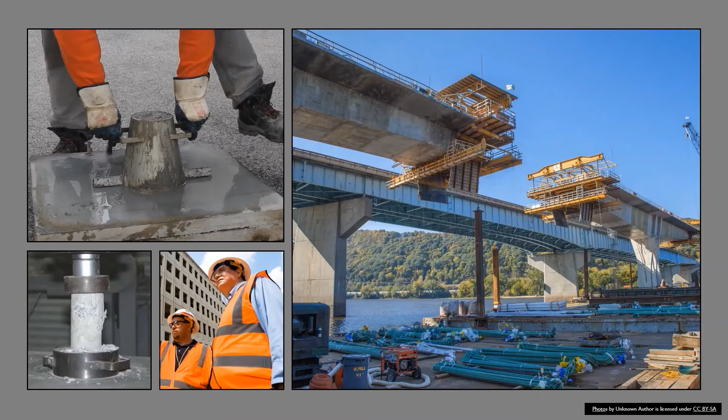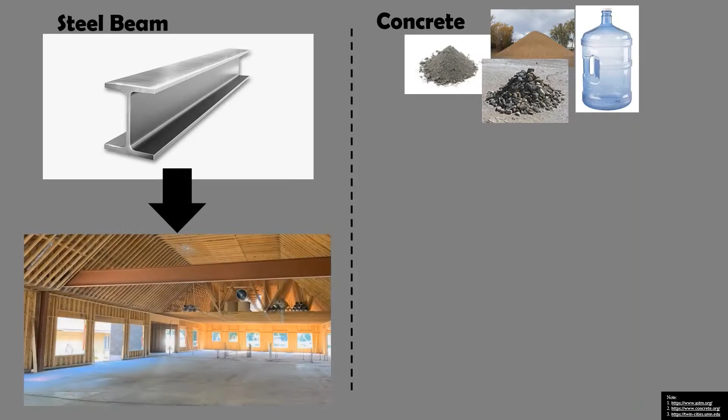Concrete is one of the few construction materials truly created during the building process. Other construction materials, such as a steel or wood beam, only need a delivery distribution path, whereas concrete requires an additional distribution path of knowledge. The University of Minnesota Concrete Conference is part of that knowledge distribution path.

What do you get from attending this year's conference? 0.65 continuing education units for 6.5 hours of participation. Presentations ranging from alternative supplementary cementitious materials to highlighting the new 11 on the River high-rise in Minneapolis. Continual participation in one of the nation's leading conferences for the exchange of current concrete knowledge.

The conference will offer you a lot, but the Planning Committee would like to give you something right now. The Universal Concrete Mix Design, which has been used throughout the world for centuries.

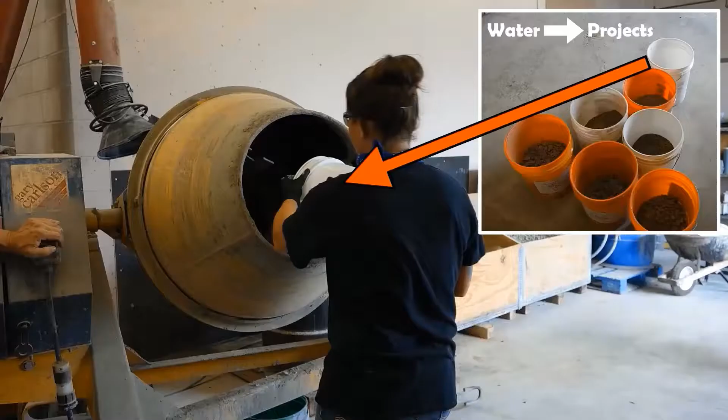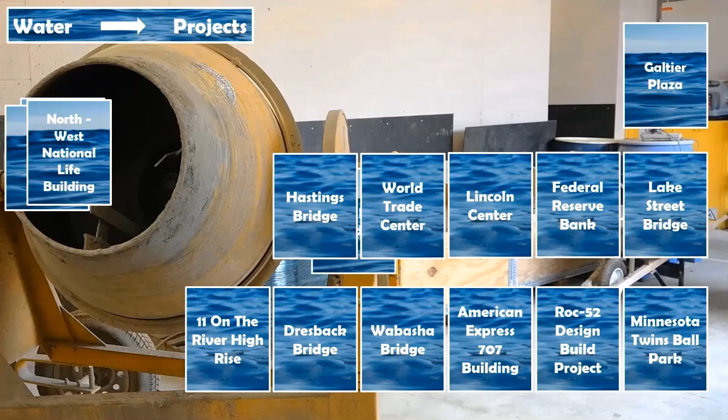We would like to draw an analogy from the 4 main ingredients in our concrete to our concrete conference speakers, audience, advancements, and projects. In our analogy, the projects that we have highlighted at this conference over the last 70 years are the water of the conference. Here are a few of the projects highlighted in previous conferences.

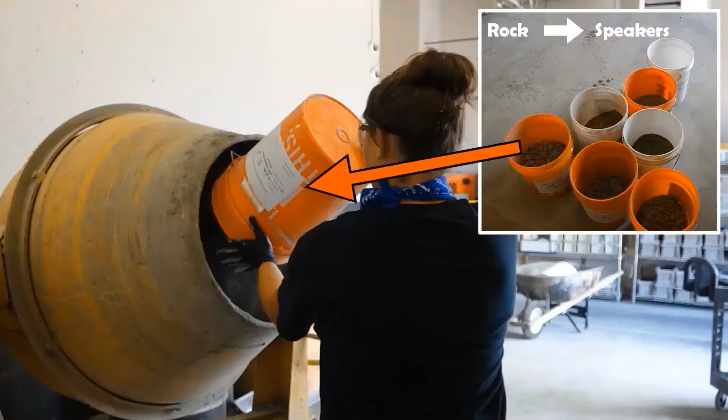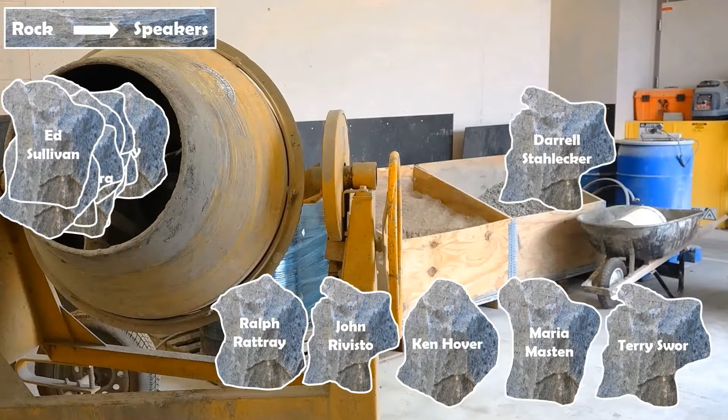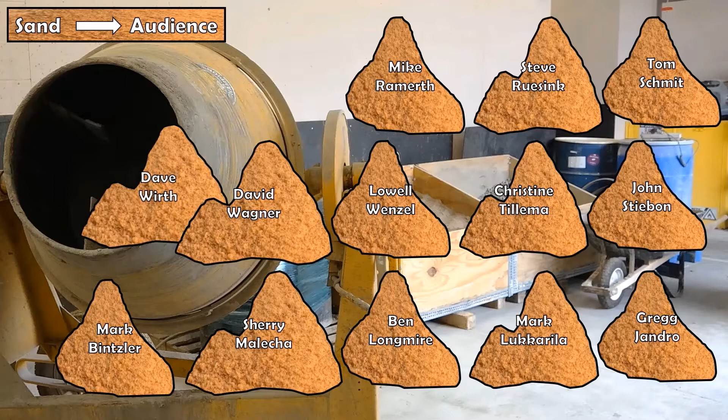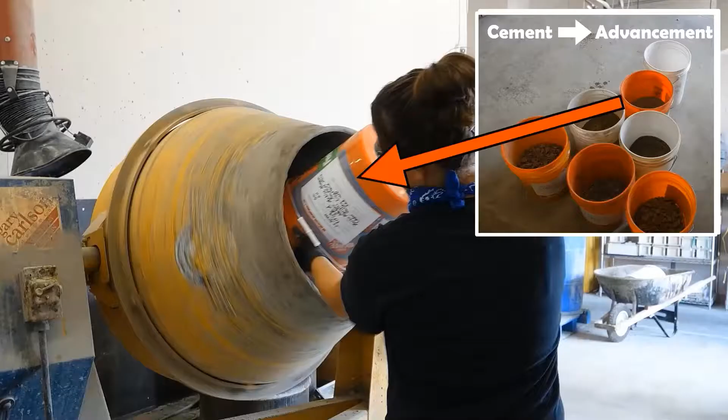Likewise, the rocks of our conference are the speakers that have presented at previous conferences. Here are a few of the previous speakers. You, the audience, are like the sand to the concrete. Many concrete advancements have been covered at the previous conferences. Here are a few of them.

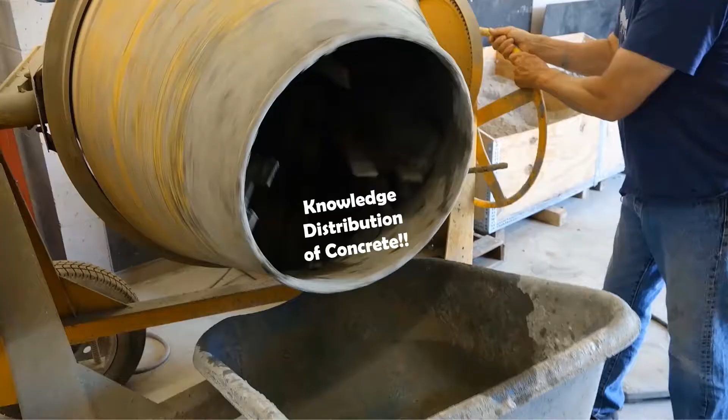Just as mixing the rock, sand, cement, and water results in concrete, the mixing of our 4 ingredients of the conference results in a conference that provides a knowledge distribution path of concrete. Here is a preview of the chapters to come. Chapter 1, History of Minnesota Concrete Conference with Tom Becken, Robert Randall, and Mac McCullough.

But overall, still, the concrete industry will stay the same. We still need sand, gravel, and cement to make it work. And so we want you to attend the next conference so that you do learn a little bit more about concrete and how it functions. We appreciate your time. Thank you.

Chapter 2, Decade of Strength, recorded at the 50th Annual Concrete Conference with Tom Dykoff. Come back with us to the year 2000 when Tom Dykoff reviews the Decade of Strength. Chapter 3, Time Travel to the 100th Annual Concrete Conference with Nancy Doppenberger, Dave Cassetta, and Kevin McDonald.

And as usual, Vitruvius, we haven't got time for your long-windedness. I'm Kevin McDonald, and I need to talk to myself in the past. Kevin, get over to the microphone. It's Kevin. Oh, hello, Nancy. Anyways, Kevin, where are you? Get over. Oh, there you are. Don't believe this. Shut up and listen.

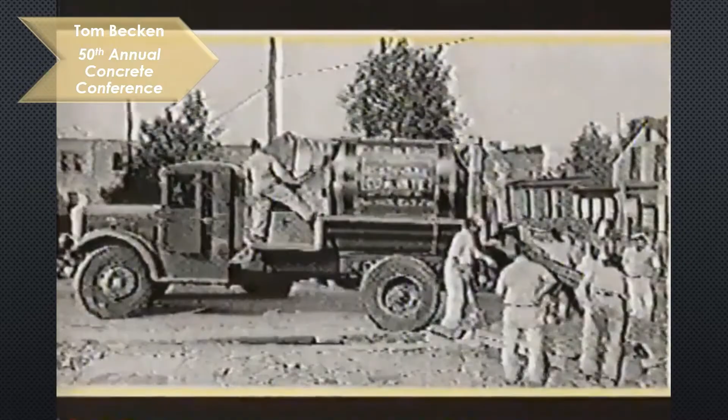Introducing Tom Becken at the 50th Annual Concrete Conference. Hello, I'm Tom Becken. I'm with the Cemstone Products Company. Our company has been in the ready-mix concrete business since 1941. The company was started by my grandfather and father back in 1927 in the block business. And yes, there has been a lot of changes in the concrete industry in the last years.

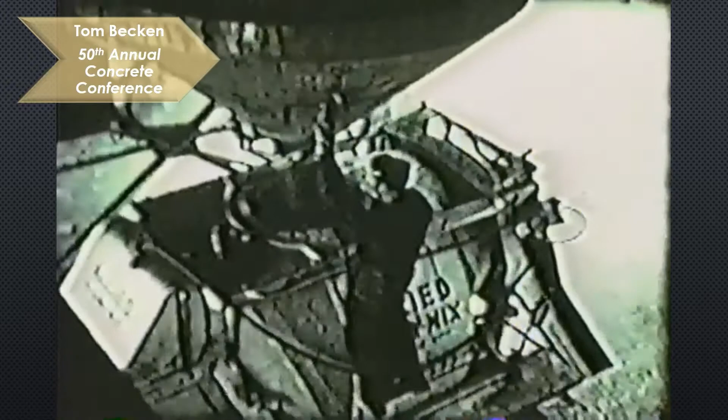We have gone from producing ready-mix concrete by pulling levers by hand to where now we use nothing but computers and printout tickets and all automated batch plants. Prior to that, when I first started, we broke the cement in bags, put it into the ready-mix trucks. The sand and gravel was weighed out, and all the levers were pulled by hand.

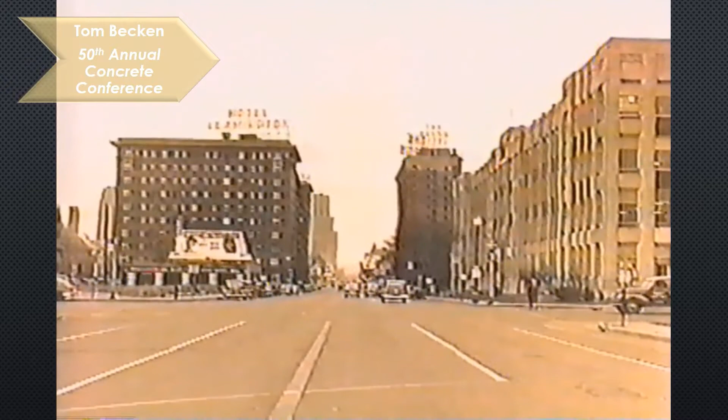And as the industry has grown, we used to have mixers that hauled 4, 5, and 6 yards, and we had a separate engine drive on the mixer. And today, most of our trucks are hauling 10-yard loads with the engine being powered off of the truck. The concrete has changed considerably.

We used to produce concrete on the basis of 1, 2, 3, or 1, 3, 5, or 1, 3, 4 by proportions. Then I remember it went into where we were producing concrete by the bag, 5 bag, 5.5 bag, 6 bag. And then the industry changed some more, and it changed where we were producing concrete by strength, 3,000 pounds, the 3,500s, the 4,000 pounds.

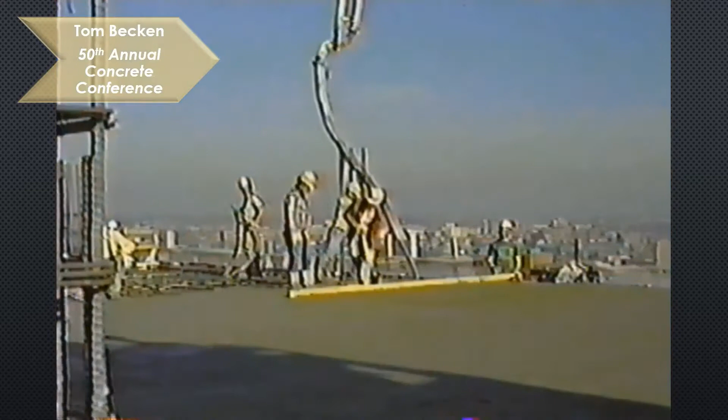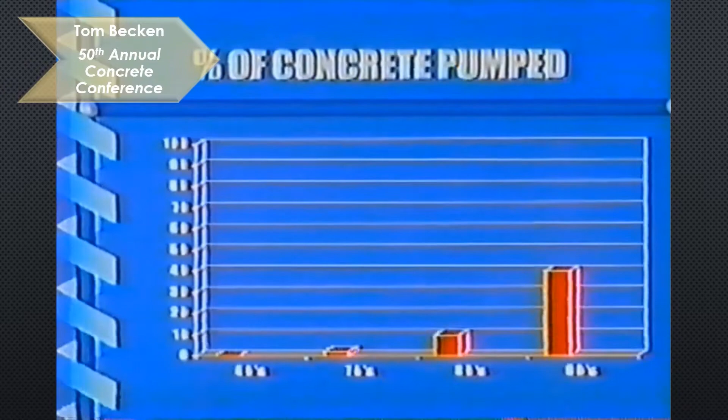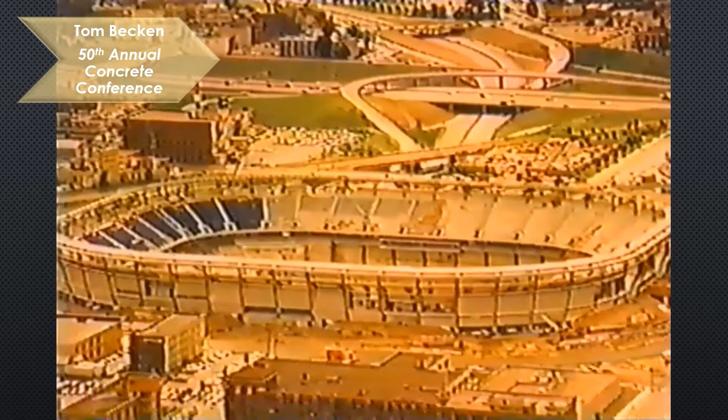And the most admixtures that we were using was air entrainment, and then we would use calcium chloride in the winter and spring and fall. And now the concrete industry has changed where we have gone to using the water cement ratios, and adding microsilica and super plasticizers and all types of different admixtures. Some of the concrete we produce today, we produce with very little water, using a lot more admixtures.

We used to use nothing but 3/4 and half, and then add the 3/4 inch gravel and 1/2 inch. Then we got away from that and went to making 3/4 and 1/2 inch and 3/8 combined into one. Now we have changed back, where we are adding the different sizes of gravel and blending them back in to make a better product.

We are just building a new plant down in Burnsville, which we're opening, and there we have 10 bins so that we can accommodate all the different aggregates that are being used today to make ready-mix concrete. The sand is about the only thing that has stayed consistent, and I can remember going to these concrete conferences back in the 50s and the 60s.

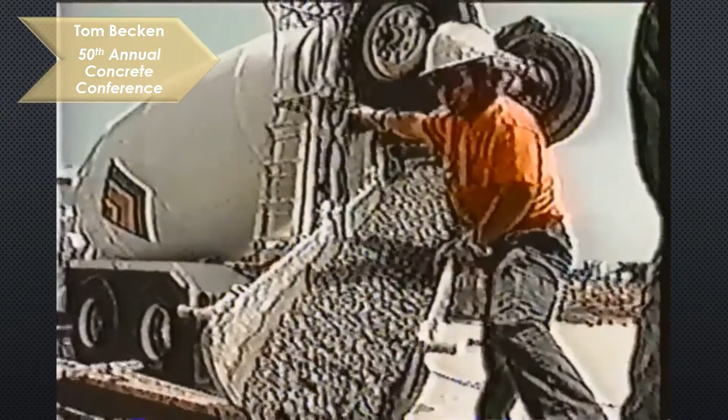Also, the industry has changed in the fact that there are a lot fewer producers of ready-mix concrete in the Twin City area. At one time, most of the producers were one plant operators or 2 plants. Today, it's down to 3 or 4 companies, and they have multiple plants rather than each plant being owned by one individual. As I look at the next 50 years in the ready-mix industry and the concrete industry, I see that we will be coming up with more admixtures to...

And in what has changed in the last few years, we still use sand, gravel, and cement, and we still use a lot of admixtures. The only change is the admixtures have changed. Cement has not changed, sand has not changed, gravel has not changed. All we're doing now is putting all this together and hoping everything comes out okay by using all of these concrete admixtures. And as we look to the future, I see that the industry will change somewhat.

The loads are bigger than they were then. The way we do it is going to be different, but overall, the concrete industry will stay the same. We still need sand, gravel, and cement to make it work.

And so we want you to attend the next conference so that you learn a little bit more about concrete and how it functions. We appreciate your time. Thank you.

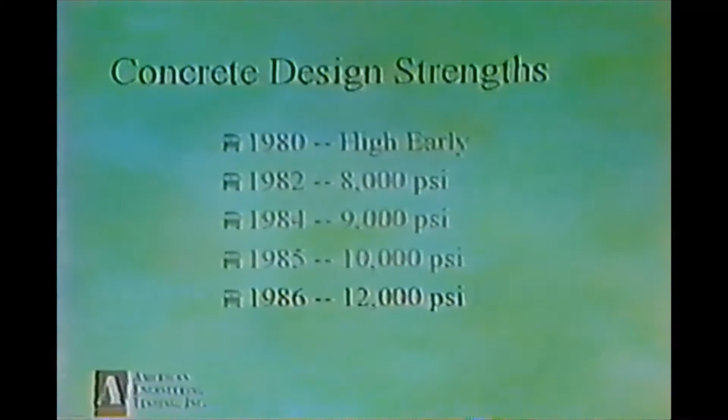In 1986, 12,000 pound concrete was introduced. And that occurred at the First Bank building. You can see we had winter construction going on here with the new enclosures. And that 12,000 pound concrete was used for the composite columns for the super piers. That building now is known as the U.S. Bank building.

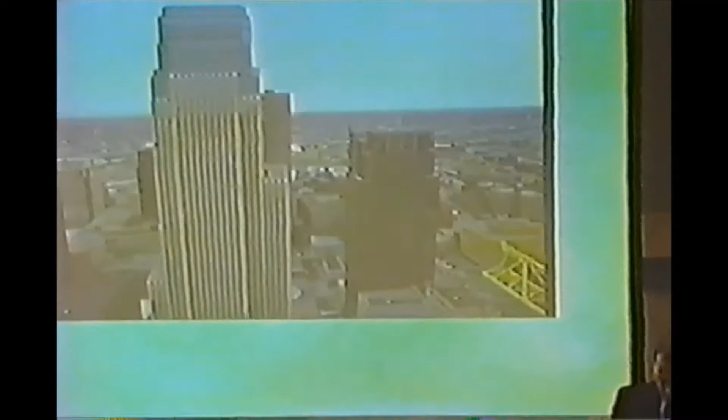1989, 14,000 pound concrete was introduced. Again in Minneapolis, that's the building to the right. That's the Dain Bosworth Tower. And 14,000 pound concrete was used again in 1997 at the American Express 707 building.

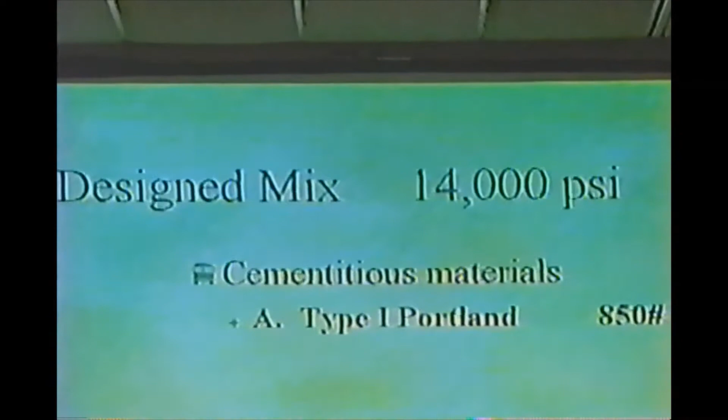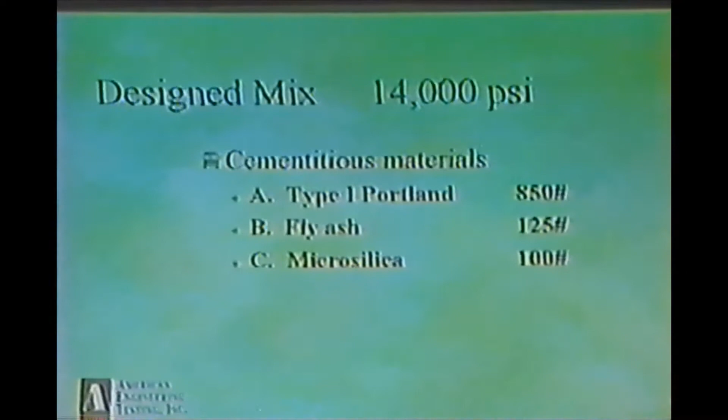What does it take to develop 14,000 pound concrete? The design mix, cementitious materials. First component is type 1 Portland, 850 pounds of materials. Fly ash, add 125 pounds to the mix. Microsilica, an additional 100 pounds to the mix. This gives us a total of 1,075 pounds of cementitious material.

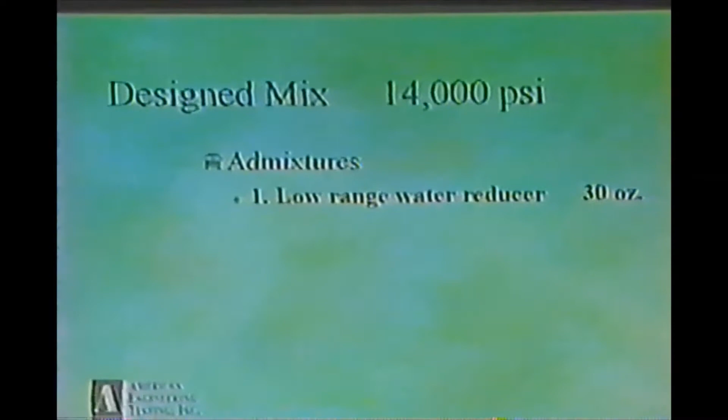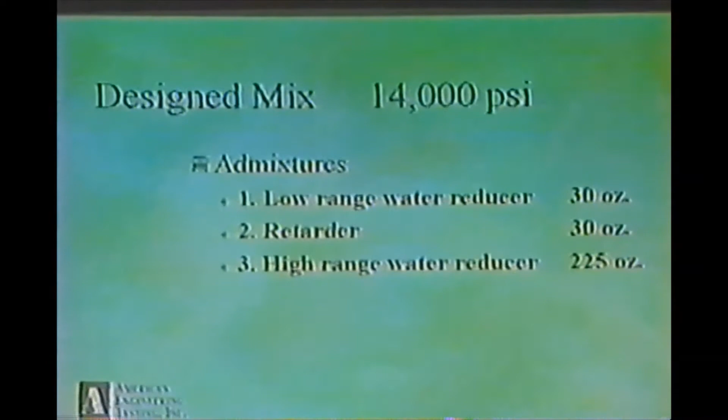Looking at admixtures to develop this mix, we have low-range water reducer, 30 ounces per cubic yard. Retarder, another 30 ounces per cubic yard. And high-range water reducer, 225 ounces per cubic yard. That alone totaled 285 ounces or 2.2 gallons per cubic yard.

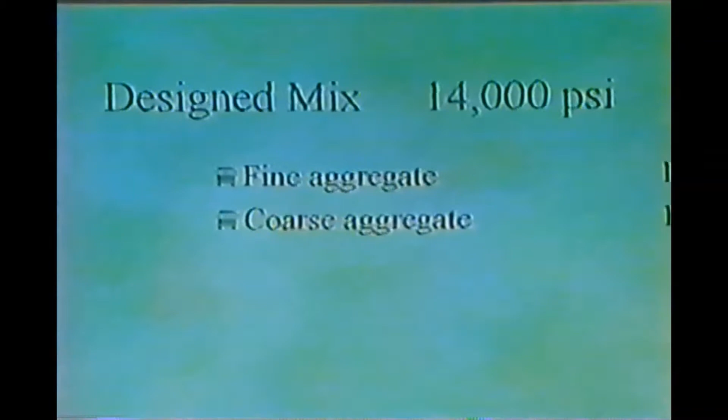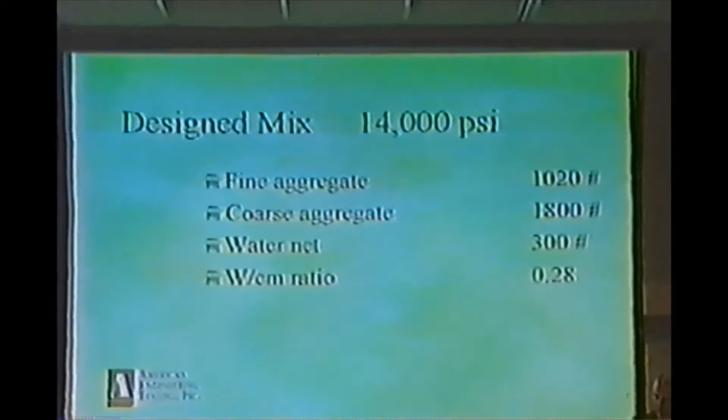So now we go to the aggregate side. Fine aggregate, 1,020 pounds. Coarse aggregate, 1,800 pounds. Water, 300 pounds or 35 gallons. Which gives us a water cement ratio of 0.28. You can imagine a mix with a 0.28 water cement ratio, how do we even get that out of the truck? The only way we can accomplish that is with those 4.5 gallons of the admixtures.

So again, reviewing that mix, you have cementitious materials over 1,000 pounds. You have the admixtures of 4.5 gallons, and then the aggregates with that water cement ratio of 0.28.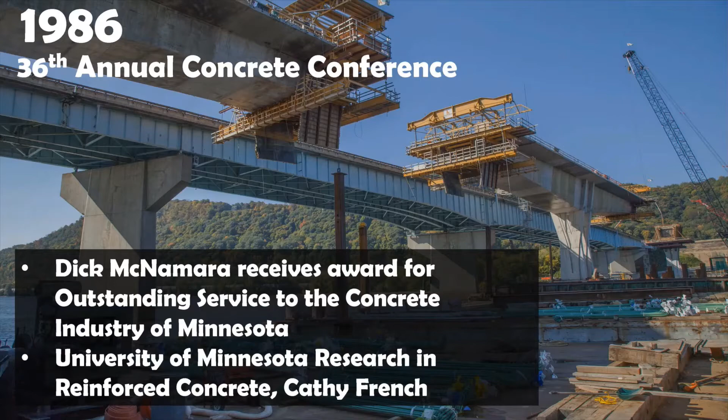We used to have a feature at each conference where the U of M would give like a 15-minute update or a little bit longer presentation related to what cutting-edge research we have going on at the university. And so since that time, I think I've been probably a member of the committee since 1987, and then off and on over the years till today in 2020.

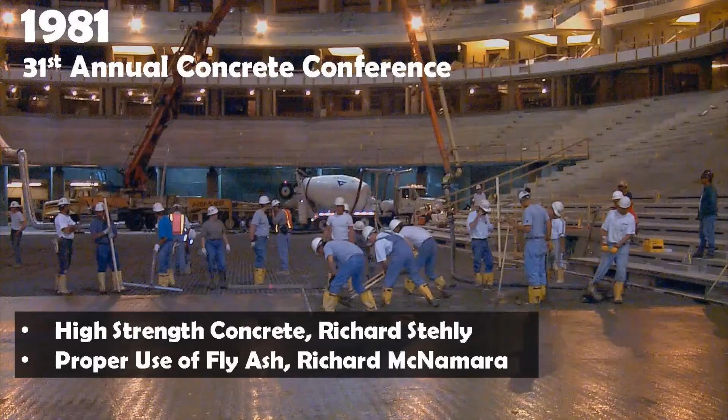And over the time, some of the research talks that we've talked about, we've had faculty at the U and collaborators, Carol Shield, Art Schultz, Roberto Leon, talk about some of those features. And when you look at the timeline, kind of back in the beginning, we talked about things like high strength concrete, where that was a very new up and coming thing. We've done work with self-consolidating concrete over the years, and we've also been looking at bringing in speakers that are renowned speakers nationally and sometimes internationally as well.

And so, in more recent, I'd say the last decade, one of the key things for the concrete industry and other industries has been the issue of sustainability and resilience. We have limited resources, and I think that the industry is really taking to mind some of the more critical needs to ensure that we have a sustainable product.

And so I remember one of the opportunities in serving on the committee is identifying great speakers for each of those topics. So one of those that we brought in is Andrea Schokker, who's now at the University of Minnesota Duluth, and other fantastic speakers who are involved in changing the environment and technology through activities, for example, in the American Concrete Institute. So there's committees associated with sustainability.

I've been a member of ACI 318, which is the Structural Concrete Committee, since 1995. And so another thing that we try and do at the conference is to give the community in this area a preview of what some of those up and coming changes are to the structural building code, so they'll be aware of what's coming, and we can answer those questions. And sometimes it's through questions in the audience that can drive input into those committee changes too.

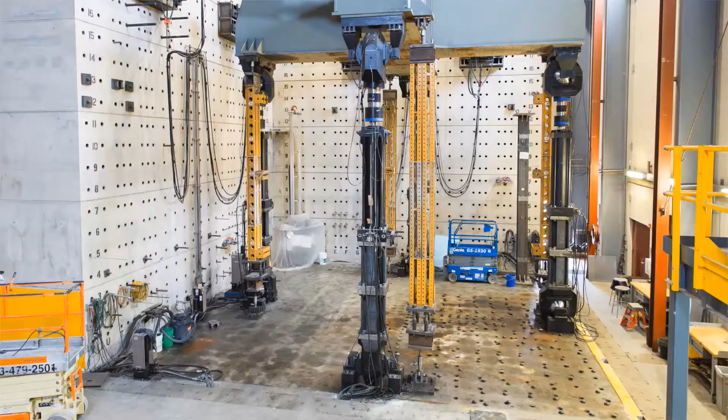Other things over the years that we've been involved with at the university just nearby: we have 2 large structural engineering labs, the Galambos lab and the MAST multi-axial sub-assemblage testing lab. With those labs we've done structures up to 30 feet tall, large portions of structural walls. Some of my very early research when I finished as a PhD student was looking at the effects of multi-directional loading on components of structures.

And in recent years with our large MAST facility, we've been testing up to a third-scale 6-story wall structure within that building and trying to make impacts through our research on things like code changes and transferring the research that we do into practice. A few other things that we've done at the U that we've talked about at the conference is a lot of infrastructure related research.

Over the years, we've been supported by national agencies, federal agencies like the National Science Foundation and the National Cooperative Highway Research Program. And then locally, we've been supported by the Minnesota Department of Transportation. And some of that work has supported projects involved with pre-stressing producers of bridge girders. So there we've been involved with high strength concrete, self-consolidating concrete, and also field projects.

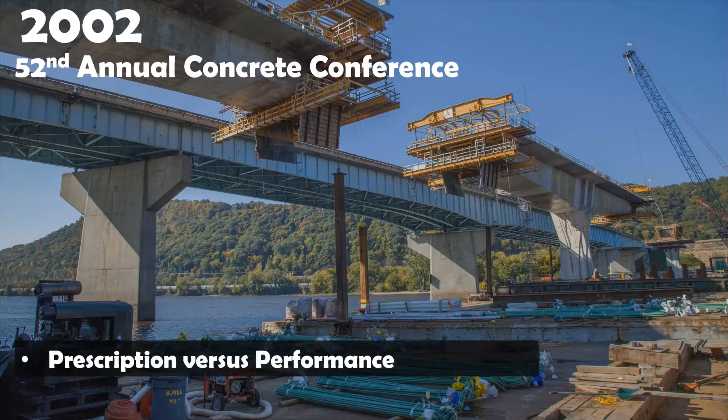It gets to be more challenging for our outstate producers who maybe have one bridge project every 5 years, and so they've got a big investment to make, and that's something that needs to be considered from the agency side and the industry side as to whether or not that investment is worth it. But it definitely brings a challenge to have contractor mix designs and required preliminary testing in the outstate area, and it does affect the metro area too. So that definitely makes things interesting.

But from there, we even went further, and in 2016, MnDOT implemented contractor mix designs for all of our concrete mixes. And so every mix design that a producer provides now, they have to give us the recipe, and we'll review and approve it for mix designs that can be used on multiple different projects. And with contractor mix designs, we eliminated the minimum cementitious content requirement, and we really opened up the use of admixtures because the producers know their materials, and so they can use virtually any admixtures except accelerating admixtures on most any mixes. And so those are really big changes with the technology and everything that's improved with the industry.

Chapter 8, Outstate Perspective and Uncle Joe with Don Brown and Dan Bruno.

My name is Don Brown. I've been in the ready mix industry since 1978, starting out with E.F. Hall's Sons Incorporated, which then got purchased by Bauerly Brothers, which then got purchased by Knife River. So I like to say that I've worked for 3 different companies, but my desk never changed. And now presently working for Kohner Materials, which was his company in southeast Minnesota, Modern Ready Mix, Wabasha Ready Mix, and some Wisconsin companies too.

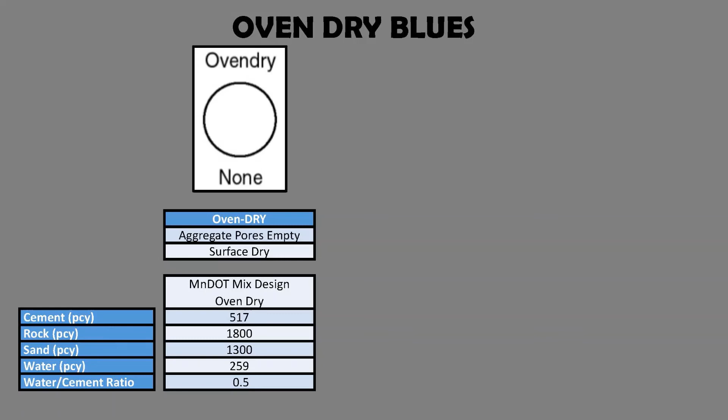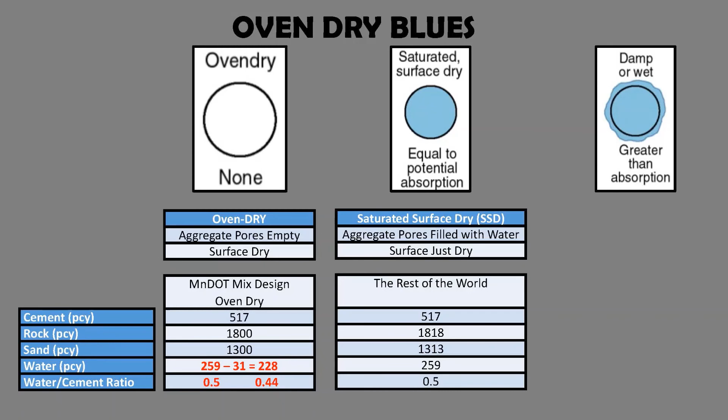Assuming our aggregate has an absorption of 1%, the rock would absorb 18 pounds of water and the sand would absorb 13 pounds of water in order for the aggregate to achieve saturated surface dry from the oven dry condition. This would result in our MnDOT mix design having a water cement ratio of 0.44. Now sit back, relax, and enjoy Pat Mancini's plea to Maria Masten, our MnDOT concrete engineer, to change oven dry to saturated surface dry.

Hey, my name is Pat Mancini, and this song is especially written for Maria.

Don't get caught up in what I say. Donnie Brown thinks oven dry's okay. Even now I sit and wonder why, how we got started with this oven dry. Hey, that was then. Now it's time, changing SSD, make things fine, make it all right. Saying goodbye to oven dry, make it all right.